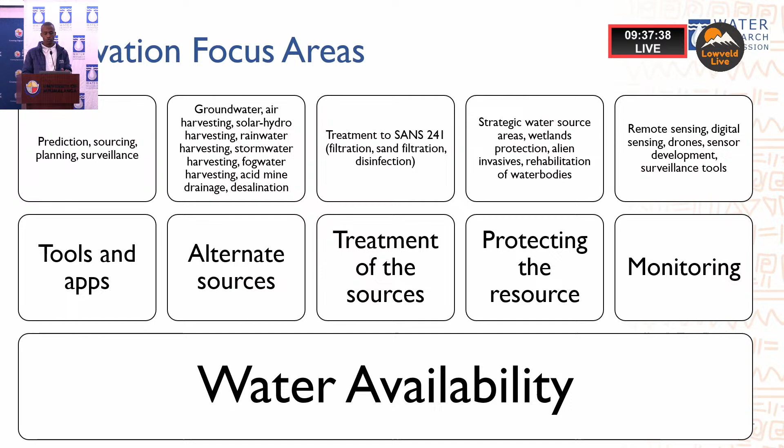And also, of course, protecting the resources, as well as a whole lot of background given yesterday in terms of our status of water resources in our country. And also monitoring, which Wandile also yesterday alluded to.

In terms of water use, we also look at water conservation and demand management, water losses, remote sensing, robotics, and some form of AI and use of technological innovations in that area to try to improve water conservation and demand management. We have some of the innovations that will be showcased later on in terms of this focus area. And water efficiency is quite important.

Actually, I'm on a WhatsApp group where yesterday an alert came in to say water alert - that Gauteng, all the councillors in Gauteng are required to attend a meeting with Rand Water, because a few days back Professor Turton from University of Free State indicated that if Gauteng does not conserve water by 10%, or reduce the use by at least 10%, we will face Day Zero soon.

So water efficiency is quite key, not only for there, but also for here as well. And as you have heard yesterday from agriculture and even the mining and the industries, in terms of water use, we need to be efficient. So there's a focus also on that area. And we have some of our innovations later on today in terms of planting a bag that uses less water, also in terms of water efficiency.

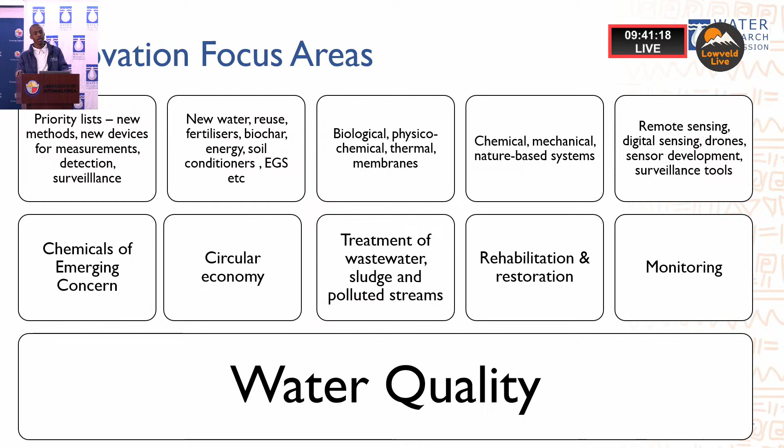And we are looking also in terms of wastewater treatment or sanitation, treatment systems that are biological, physical, chemical, and thermal processes as well, that try to not further pollute the polluted resources or increase the state further of our resources. As well as rehabilitation and restoration of some of the ecosystems through nature-based systems, mechanical systems, and also chemical systems. And also, of course, monitoring goes also with that.

So the WRC, through its RDI leg, noticed that actually some of the innovations don't get to the market, and they fail due to incomplete development. They are not ready for the market, or sometimes they are ready but the market is not ready, it has not been developed. And also sometimes innovators have not developed a value proposition, so that they present their innovations to address a particular problem, and also business viability, and also attracting investment so that someone can invest into some of those innovations as well, and also partnerships and brokering partnerships.

So hence, the Water Research Commission, through 2 key technology accelerator programs, intends to try to bridge the gap between RD and aid it to RDI, so that then the research can now start impacting people on the ground, the communities on the ground, and reach them and address some of those challenges that I just mentioned now.

So the WADER program at the Water Research Commission deals with more of water technologies, and the SASTEP deals with the sanitation technologies as well. So these are the 2 accelerator programs that basically try to be a conduit of some of the innovations and getting them ready onto the market.

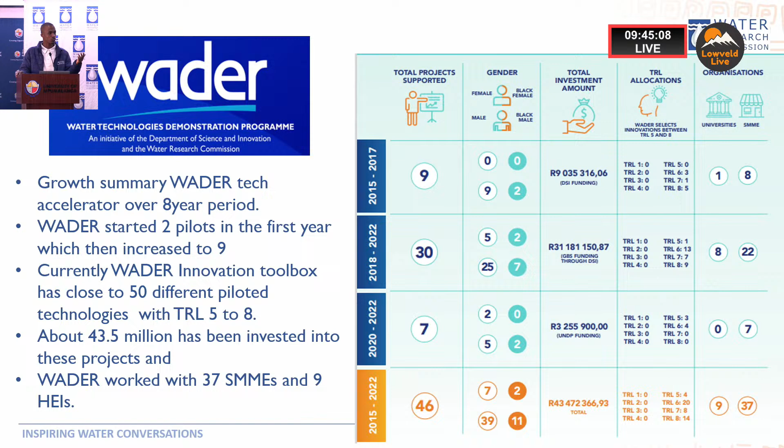So some of the technologies within WADER include alternative water sources. Groundwater is one of the sources due to limited surface water resources, so it's one of the options. We looked at things like sand water extraction, which we'll hear more of a presentation on later. And there's an innovation called Hydroblu, which helps in terms of accuracy of drilling boreholes for alternative water sources.

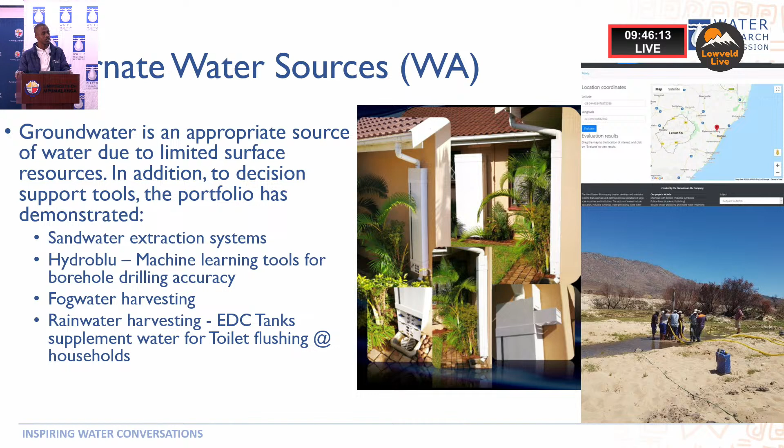Fog water harvesting as well, and there's this innovative EDC tanks - we'll play a video of that later on, which shows how you can harvest rainwater to supplement water for other non-potable uses in the house. The 3 pictures show you some of the innovation in the EDC tanks, as well as the sand water extraction pilot that we have had. The last picture is showing the Hydroblu.

So in terms of water quality and water use at the household level for communities, in terms of rainwater harvesting, we have this innovation called Villemans, which is a form of filter, so that the water you would have harvested from rainwater, which still contains some solids, you can filter using that, so that then you can use it for other fit-for-purpose uses like flushing, gardening, irrigation.

And also the slide-on gutter technology, where now for every form of roofing that you have, you can just harvest rainwater, especially if you have big coverage in terms of your house and roofing, so you can use some of these technologies to harvest rainwater. And also this grey water system that can be used for multiple use and a hands-free system, which you can use for encouraging hygiene and reusing grey water.

And in terms of non-revenue water, we try also to employ technology to do that. So there is this technology called AquaTrip - basically it's a valve that stops if it notices an unusual change in pressure, so automatically it shuts off because it will suspect that there's a leak somewhere. It has been piloted, and it's one of those innovations that can help in terms of water losses.

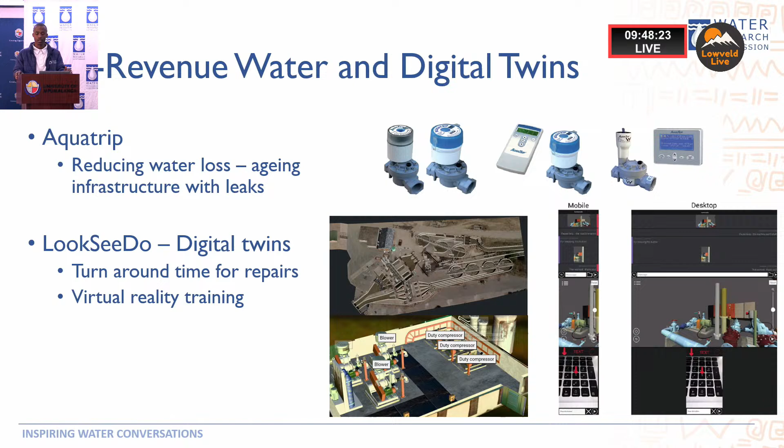And then digital twin - it's basically a look-see-do, remote assistant system, which means you may not always need an engineer on site. You can just have the system with a technician on site, and they are guided in terms of how they should fix or address some of the challenges on site, so that you are able to address a problem even quicker, because sometimes engineers may not have time to come to all the sites at the same time.

Coming to sanitation now - SASTEP stands for South African Sanitation Technology Enterprise Program, so that is for more of the sanitation technologies. You notice that the WADER portfolio covers more of the water themes and SASTEP covers more of the sanitation portfolio. Like I said yesterday, South Africa was not going to be able to achieve and provide full flush network-based systems for all communities due to the terrain, settlement types, water scarcity, and even issues of economics and challenges with regards to density.

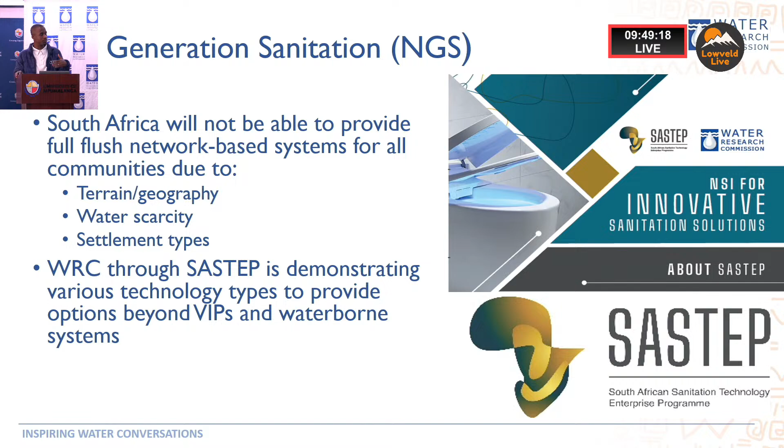So through the SASTEP program, WRC is demonstrating various innovative sanitation technologies beyond the two-binary approach, which was a VIP or waterborne system in the past, so that there's a pool of technologies that could be considered for different appropriateness under different circumstances or settlement types.

So the portfolio has 16 innovations, which include 3 non-sewer sanitation systems, 1 nature-based system, 4 water resource efficient pedestals, and sludge beneficiation and management technologies, 2 grey water systems, as well as one menstrual pad incineration system called the SHE, as well as a liquid gold diamond reactor which converts urine to struvite, and also technologies to address smell in existing pit latrines, including chemicals that we have worked with.

So just a bit of a snapshot of the program. 16 technologies are on the program, and through it, 6 technologies have been locally manufactured, some licensed internationally and some local. We've gotten 6 technologies locally manufactured, about 200 toilet seats installed in schools as demonstrations, affecting about 5,000 learners across various provinces, and about 30 million has been spent encouraging local manufacture of these innovations.

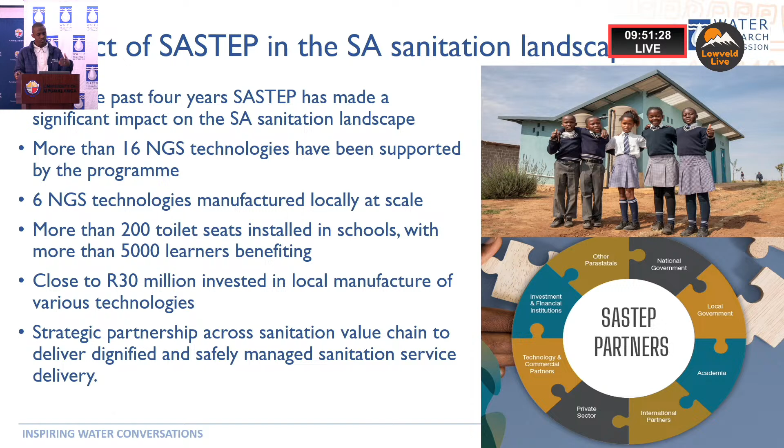We have struck partnerships with various key partners along the sanitation value chain, including national government, other parastatals, local government, academia, international partners, as well as the private sector and the community.

Some of the success stories include the demonstrations on the ground, which you can always visit at any time. Fortunately, we have one system here in Mpumalanga which you can go and visit. We've also seen uptake of some systems through CSI, and the CEO gave a good form of something that can be considered to aggregate CSI initiatives for such systems. We also have informal and rural setting demonstrations at those municipalities.

And recently, the WRC SASTEP program has been recognized at the World Water Congress in Toronto for its work advancing sanitation.

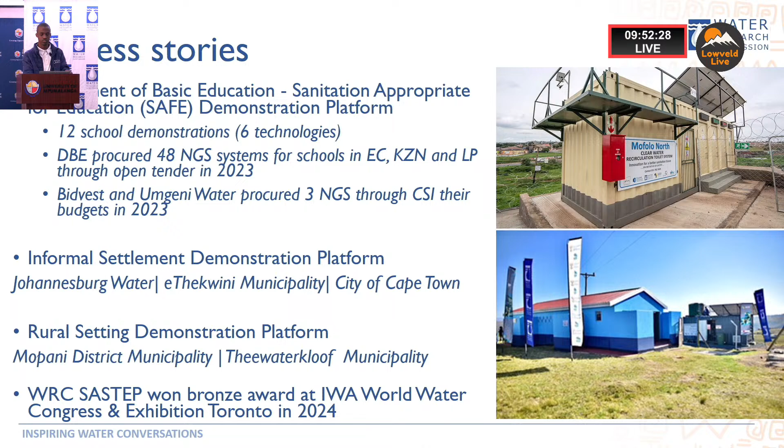Coming back to WADER a bit, some of the success stories: AB Farms has now become a fully developed business. Basically AB Farms does hydroponics, which uses less water, even recycles water, and uses less space to still achieve more with less. It's one of the technologies under agriculture addressing the challenge of doing more with less.

The look-see-do that I showed earlier has been adopted by Joburg Water in one of their wastewater treatment works. And the sand extraction has also been adopted by Amatola Water to assist with the water mix at one of their RO plants at Albany Coast.

We also do some form of skills development, because behind all these things, skill development is important. One of the key programs within the Water Research Commission is the Young Engineers Change Makers program, an annual program attracting young people from municipalities, who for a year get exposure to local demonstrations we are doing, but also international demonstrations, and boot camps to learn about some of the innovations. We also arrange international experts to come and engage with them, so that we can address and build capacity within them for the future.

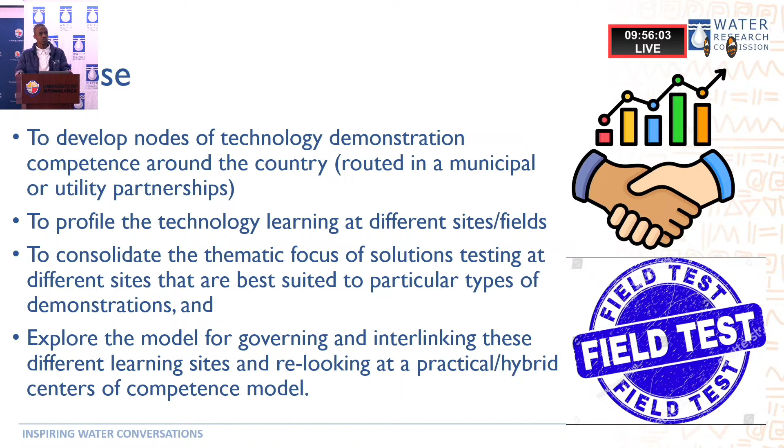So, like I said, each one of these testbed partners may be at one of those levels. Level 1 can be a university at bench scale. Level 2 can be a facility that is interested in innovation but does not have a dedicated facility for testing. Level 3 will be a water solutions testing facility or research lab with a dedicated space available for piloting as well.

Such as the UKZN, which has formed what you call the WASH Center, which is really doing well in terms of that. And also now the next level is where there is staff dedicated only for doing the R&D and the piloting of those new technologies as well.

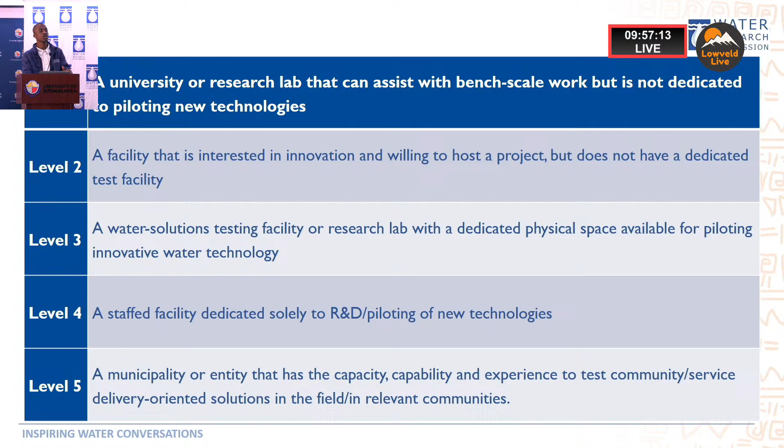And then level 5, where the municipality or the entity has the capacity and capability and experience to test community service delivery-oriented solutions in the field, such as what we call the engineering field testing that has been established by the University of UKZN, as well as eThekwini municipality and the private sector organizations involved.

So this is just a footprint in terms of where of some of the testbed partners in the country. We have 15 in Gauteng, 3 in Mpumalanga, 12 in KZN, as well as 4 in the Western Cape.

In terms of SASTEP, there's about 28 sites, with 5 in Gauteng, 2 in Limpopo, 1 in Northwest, 6 in KZN, 6 in Eastern Cape, and 8 in the Western Cape. Mpumalanga is not featuring, but we are featuring in terms of uptake. So you guys are already taking up, so you should feature in terms of uptake.

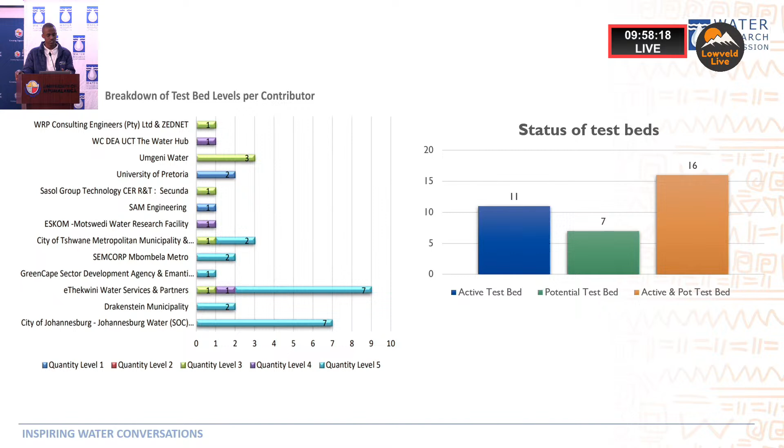All right, so this just shows the status of some of those testbed partners. We have 11 active ones, potential ones where we are engaging 7, and about 16 of them that are actively still running. And also this just shows you some of them, including the private sector partners: Sasol, Eskom, City of Tshwane, GreenCape, the list goes on.

All right, we do also do tech advisory, as I said earlier on, where various challenges that are facing these innovations, we try to address them, including technical, regulatory, market, business support, social development studies, and governance as well. So we have a panel of experts that are able to address or help us do a quick study to address some of the challenges or identify policy gaps that should be looked at.

And also independent technical assessment, where we don't just believe what the innovator is saying, but someone independent comes and evaluates and gives an independent opinion of that particular technology. And also there's an opportunity for engagement with some of the experts as well. And then we do provide a technical advisory note on some of the innovations and recommendations, if there are gaps in some of the innovations.

So today's speech, as I close, is just to show that as Water Research Commission, one of the outcomes is we want to be an innovation-driven sector. So based on some of the needs in the province, one alternative water supply innovation will be presented, one storage innovation or solution will be presented, 2 smart water apps, as well as 1 smart agriculture approach or innovation, and lastly 1 sanitation system for communal environments.

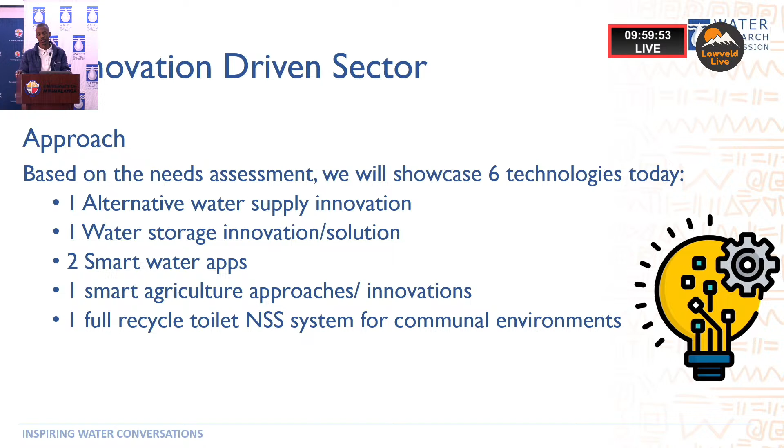All right, so you can engage with us. There are contacts in terms of adding to our testbed partnership if you are not already there, and see how we can work together to try to improve the sector. Thank you so much.

Thank you very much. I appreciate the presentation, and I think it's very important that I highlight that this shows that WRC is an innovation-driven sector. So one of the things that I just took from his presentation, which is very important, is that we are looking at water use efficient technologies, which we need to strengthen our capabilities in the province. And also wastewater technologies, treatment technologies, is something that we have got challenges with.

We're talking about, even yesterday, I think the municipality, even DWS, raised those. So these are the takeaways just for the WRC to make sure they look deep into these things that we really need support on in the province. The other one is around skills development. I think we talked about it. I saw that program. I wanted to say how many of the skills development programs did you also influence from Mpumalanga? So I think there's a gap. If you look at these key 3 things, we were just talking this morning with the provincial head to say, what are the takeaways?

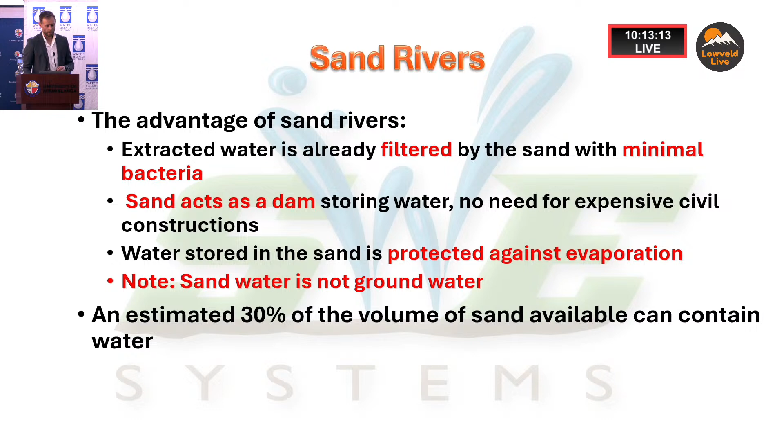It is not linked to your groundwater table directly. So your water is going to be around, let's say, starting at 30 centimeters depth, where your groundwater might be at 60 meters depth. So it's separate, it's not groundwater. You can work out the estimate of your sand volume, around 30% of your sand can store water. But the main challenge has always been to efficiently extract that water from the sand.

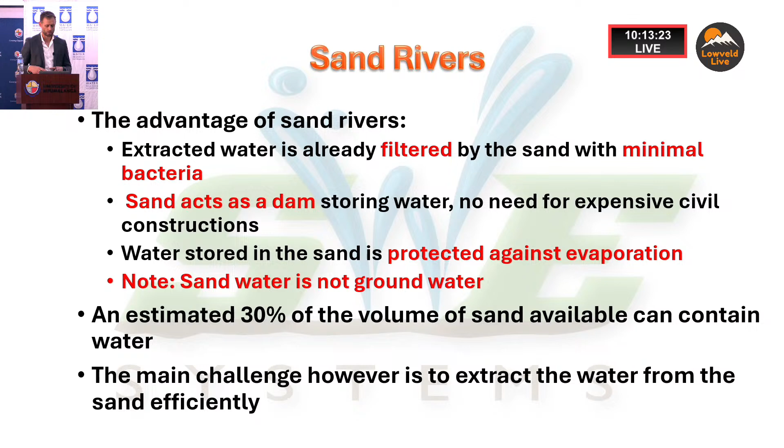So that's where the technology comes in. If you look at the design of the system, it creates a suction force within the sand, sucking the water from the sand up to 10 times faster than your natural infiltration rate. The system is fully concealed, so everything is under the sand, meaning even during floods it continues to supply water. It is quick and easy to install, and what's very important for us, it is automated and easy to use. The moment you make something too complicated, it becomes a white elephant.

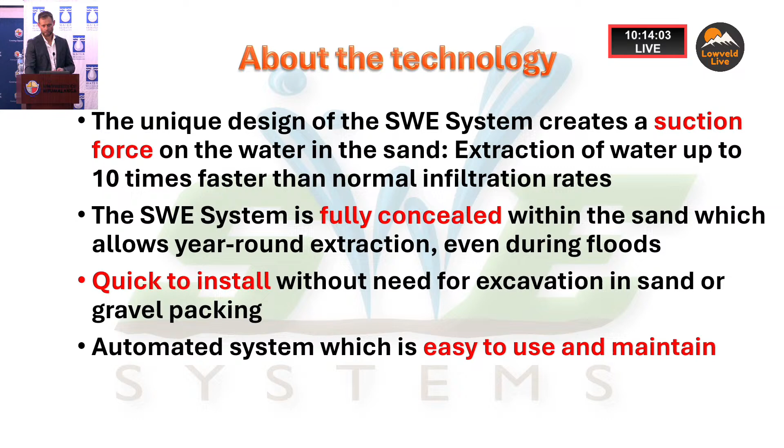So a basic diagram of the system: it is installed vertically. We only extract at the bottom section of the unit, because your cleanest water is also there, and you've got a longer water supply during that period. That water is sucked out and pumped to the surface.

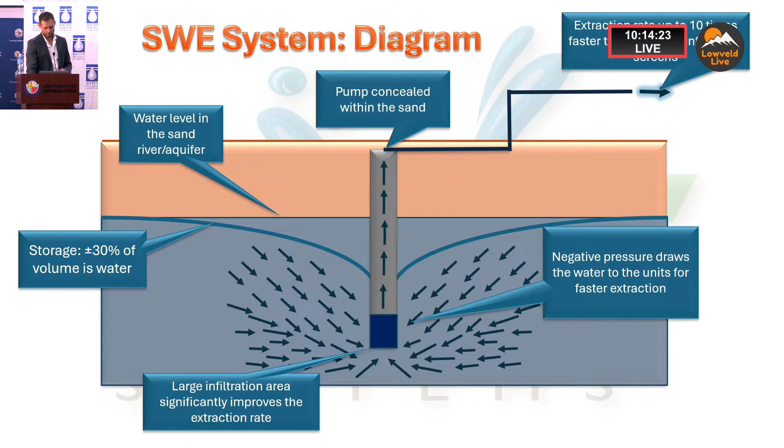Now, the needs that we address are firstly, a remote village without access to water supply, a water treatment plant overstressed by poor water quality, emerging farmers lacking access to water, or game reserves that need water for animals and accommodation areas. In this presentation, we're going to focus on the first two.

So firstly, looking at Mpumalanga and the sand rivers. In Mpumalanga, the sand rivers are mainly focused in the area to the east of Mbombela and up north past Bushbuckridge. This is not to say that's the only areas—those are the main areas. There are a lot of other sand river options, and each municipality will know better what is in their area. But the examples we're going to use mainly focus on this area.

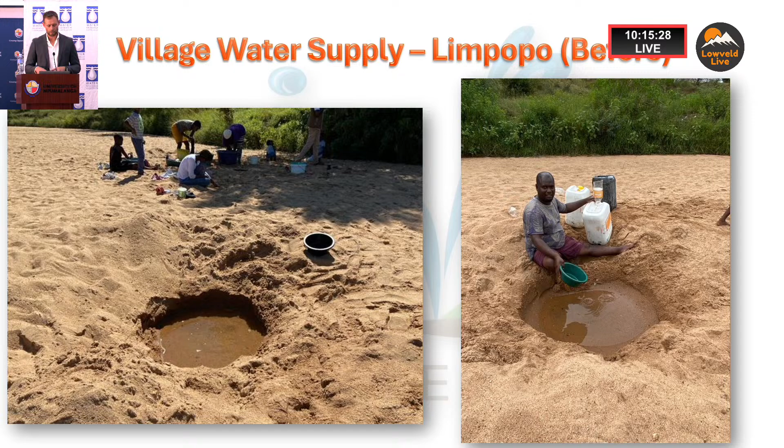So looking at village supply, I'm going to give examples of projects we did in Limpopo. This is the situation of the villages when we got there: they had to dig for water, and that was the only clean, drinkable water they had. The boreholes were struggling to supply water—they could get water once every four weeks, and that was very saline-based water.

When we started the installation of the technology, within the first week of getting to site, we started supplying water to the community, clean water coming from the sand. We pumped on average 60,000 liters a day for communities coming to fetch water. So it was an immediate effect on the community.

After completion, this is a good example of what a village system includes. You've got your sand river at the back, which only runs a few times in a 2-month period throughout the year. The rest of the time, there's no surface water there. On site, you've got your raw water storage, your extraction units in the sand, purification, then clean water storage. The large tank is a 350,000 liter storage tank, connected directly to the existing reticulation network of the village.

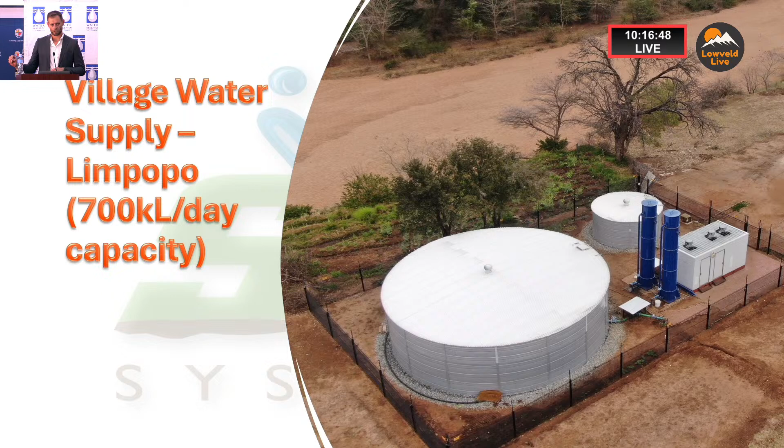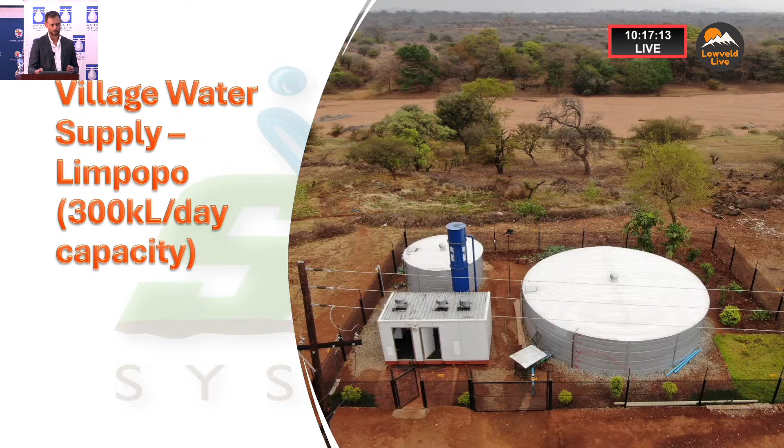Another example is a 300,000 liter a day capacity system. What's important about this image is that this site is 4 years old. If you look at the quality of the site, the community is looking after it themselves. They're planting trees, fruits, vegetables, and grass. They're really looking after it because they can see the value of their system.

To date, those systems have supplied over 200 million liters of purified water to the communities. A system can be completed between 3 and 4 months, and it can be managed, if required, by the community members themselves. Now, examples of Mpumalanga village supply.

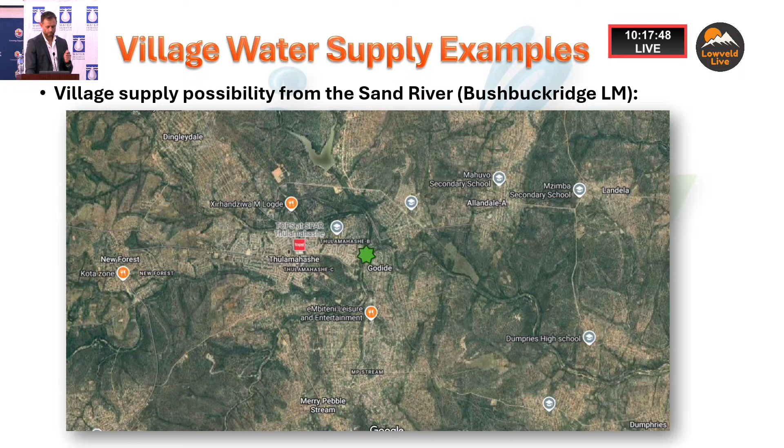If you look at Bushbuckridge, there's an aptly named sand river running through the villages in that area. If you go and look at the sand river itself, what we see there is a massive water source that can supply a lot of these villages with their own water supply. Anytime we see an image like that, we see good quality drinking water.

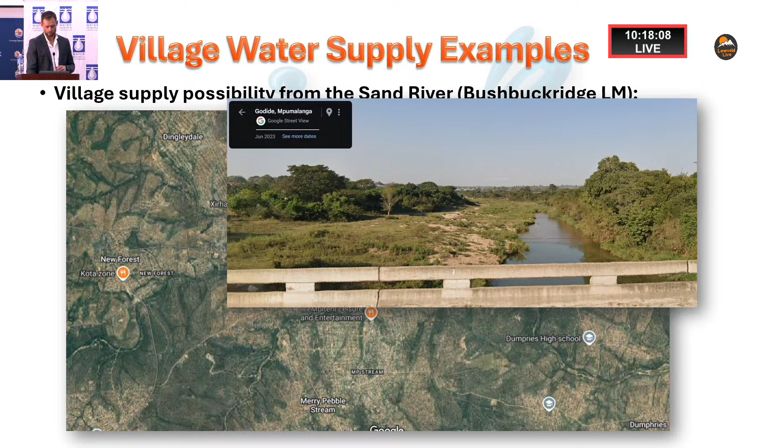I just want to use this as an example. No history about the project, it's just a project that I saw, but I think it's a good example of possibilities - the Dumphries B development. If any such development wants to be done and there's a water shortage, instead of putting additional stress on your existing treatment plants, this one requires around 600,000 to 800,000 liters a day.

The Sand River next to Dumphries is excellent for water supply. If you look at that water level, it's very difficult to abstract, but the water is in the sand. So it's available for a development like that.

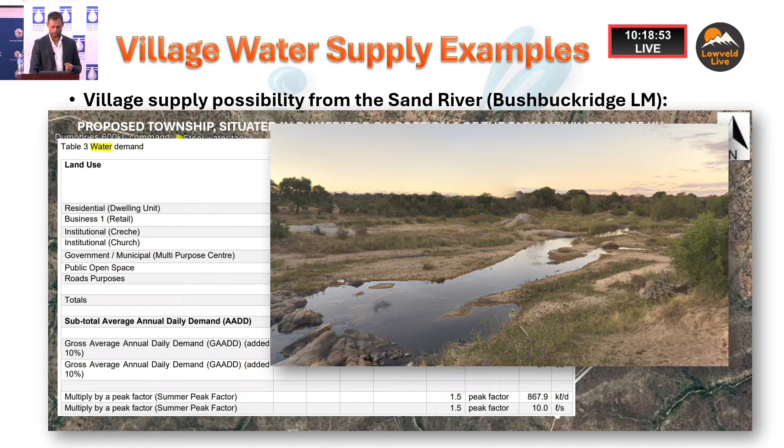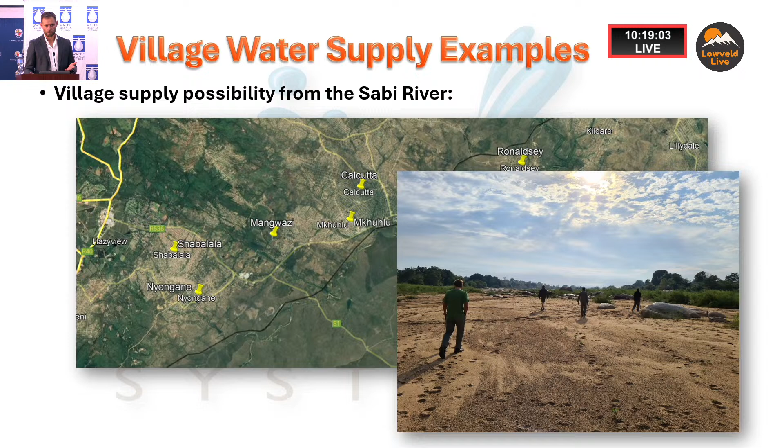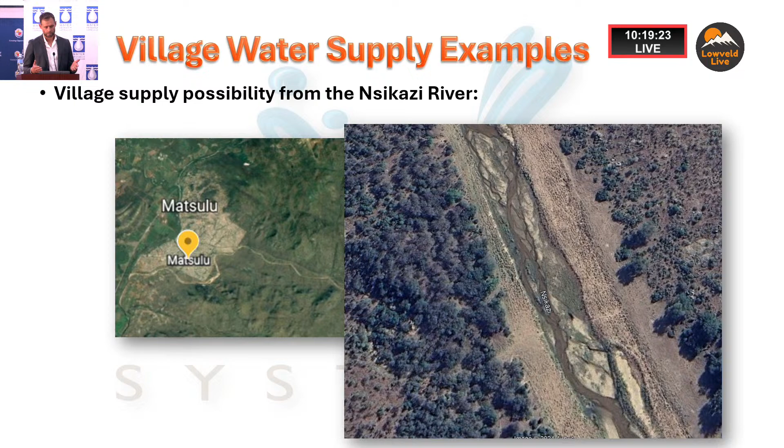Examples of villages next to the Sabi River, to the east of Hazyview - that's the Sabi River, for us a massive water source. The Nsikazi River, if you look at Lupisi, Matsulu, the villages running next to the Nsikazi, again a very good water source. We are talking to guys looking at developing in Nkosi City, and this river is an excellent water source for Nkosi City.

Now, touching on the second point, municipal water supply. This is mainly raw water supply, because what we do is supply to existing water treatment plants, and from there it's treated by the municipality itself.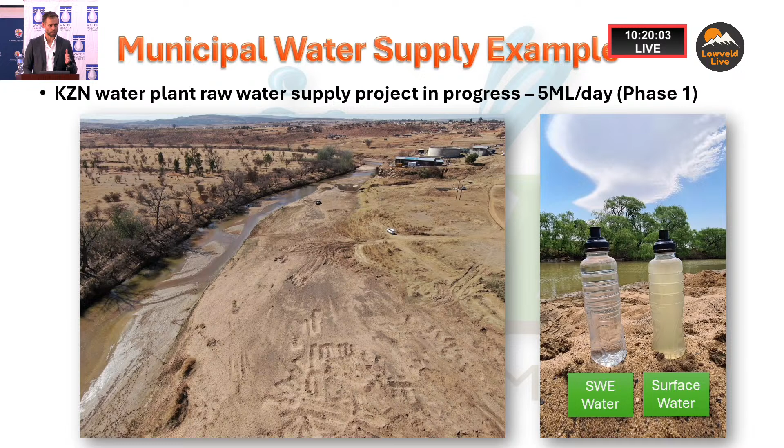An example is a project we're doing in KZN. The first phase is a 5 megaliter per day abstraction. They're looking at a 3-phase approach, up to a total of 15 megaliters a day. If you look at the river, they are struggling to abstract that water because it's very shallow, so they can't supply sufficient water to the communities.

Looking at the two bottles, the water on the left is from the sand, the water on the right is from the surface. The turbidity of the sand water is less than 1 NTU - we were running below 0.6 NTU of water supplied to the plant, where your surface water is over 25 NTU. Now, the impact of that - if you look at the plant, we do not use the clarifiers or the filters.

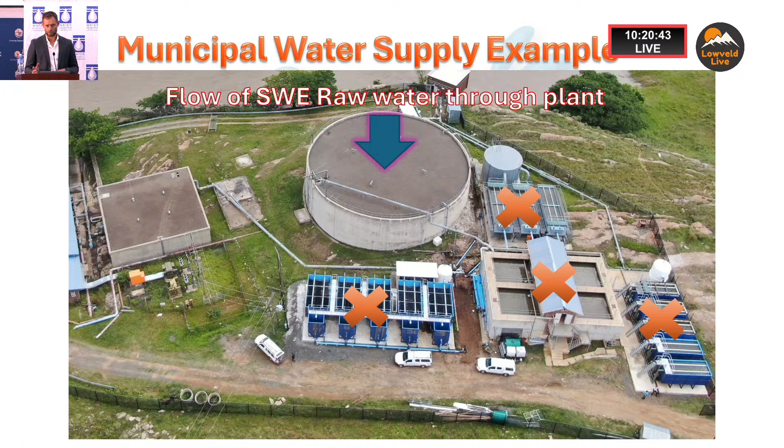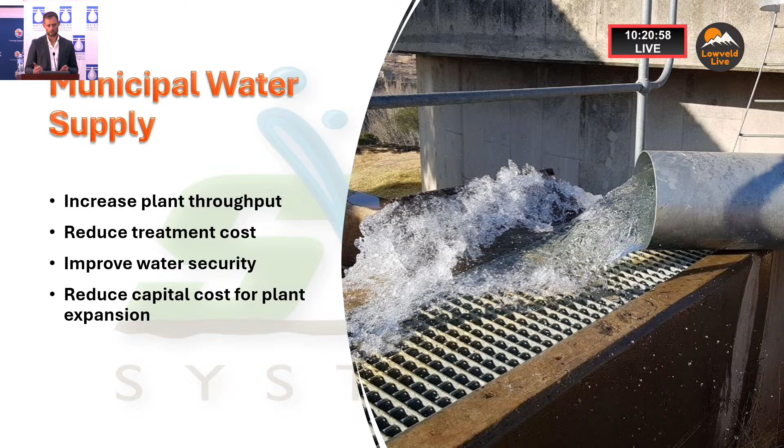We go straight into the clear water tank. From there, chemicals are added and it is supplied directly to the communities. The impact of this is increased plant throughput, reduced treatment cost, improved water security, and if you need to do expansions, you can reduce the cost because your incoming water is significantly cleaner.

Municipal supply potential - two examples are next to the Crocodile River: Malelane, Hectorspruit, Komatipoort. We've done extraction tests at Malelane to see the water delivery potential, which we found was very good. And then also at the Sabie River, you've got Hazyview as an example.

And I made my 10 minutes, thank you. That is a summary of what the sand water system does.

Thank you, Stefan. As he was presenting, I felt like I have been also extracting sand because I'm one of those community members who once dug some of those things to get fresh water. So some of us have done it.

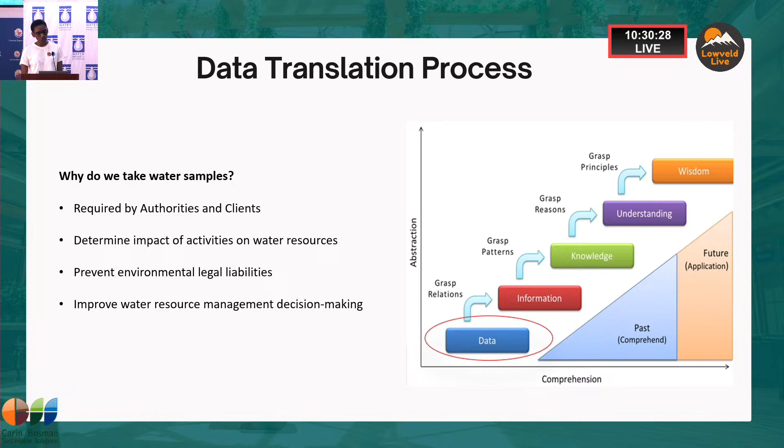So why do we actually take water samples? We do this because it's required by authorities and our clients, and also to determine impacts of activities on the water resource.

What is the problem we identify? We realize that we are very data rich, yet knowledge poor, because different organizations collect large amounts of water monitoring data, but they do not know how to utilize or interpret it properly.

Another issue is insufficient decision-making without proper analysis, and all of these lead to wasted time and money, legal liabilities, and loss of trust from authorities and stakeholders.

To introduce our solutions, we have Leguaan, software as a service, and our WaterMonster. Leguaan converts your water monitoring data into interactive graphs, available online in HTML format, very interactive, meaning your water monitoring data becomes a valuable business and water resource management tool.

Our WaterMonster app enables digital capturing of your data, including electrical conductivity and water conditions, and it actually captures the location of where you did those samples.

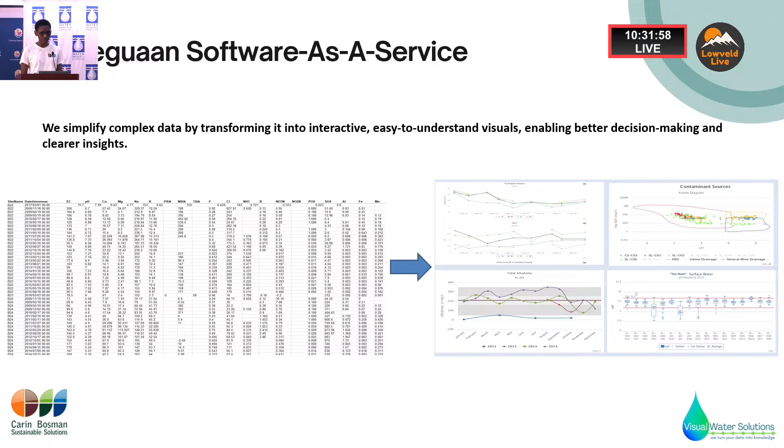So we help you convert your Excel data into more interactive graphs and reports. This is an example of our graphs that we do with Leguaan, and please do come to our store so I can show you how interactive they are.

The benefits of Leguaan are simplified data interpretation, real-time data accessibility, cost and time efficiency, and improved compliance and governance.

These are our packages, also available on our website, and I can show you when you come to our store. They range from the basic plan to a water guide plan, from 50 Rand to 200 Rand.

This is just a tour of our WaterMonster app. It's basically a digitized field data collection form that gives you your results immediately when you get to the office.

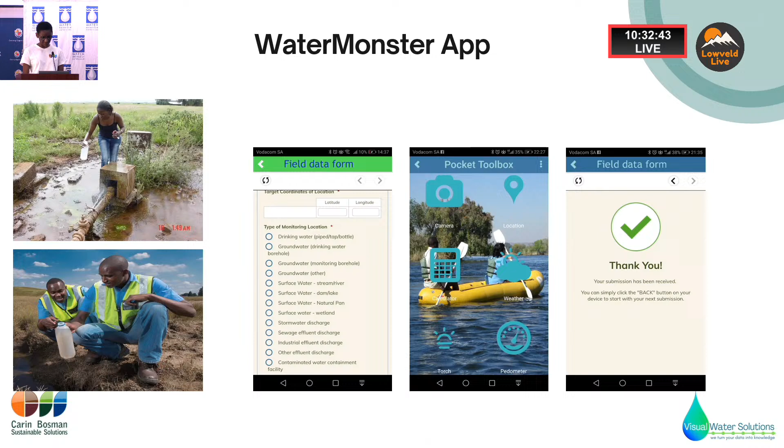The benefits of the WaterMonster are digital field data capture, geological and photographic records, instant data availability, and a user-friendly interface. These are also the prices of the packages we have, and we also tailor them according to your needs.

With the support we got from WADER and the WRC, we were able to conduct a comprehensive business model analysis and develop a strategic plan that revealed significant growth potential. This was conducted by Bosch Capital.

Our goals are to increase clients' adoption, to get about 10 clients for both Leguaan and WaterMonster, to expand app availability to have it on iPhone, user engagement and training, and also to create employment opportunities.

Our plans moving forward: we want to refine our WaterMonster app, focus on marketing and sales, legal compliance, and intellectual property to make sure our innovation gets patented, and lastly technical team and operation support.

The assistance we need is partnership with local municipalities, access to network and market connections, technical and product development support, and marketing and PR support.

In terms of our competitors, we have identified three: AquAffirm, Aquatic Informatics, and Xylem. Our value proposition or competitive edge is that our products are custom built for local conditions, user-friendly with no need for expertise, and cost-efficient.

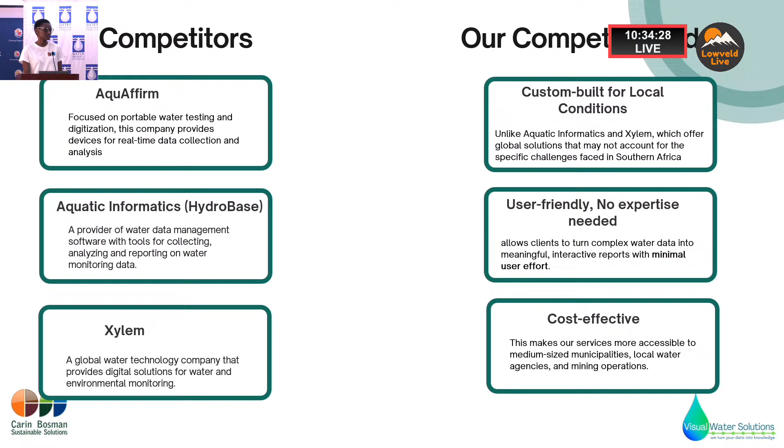So our call for action is if you want to collaborate into making, turn water monitoring data into accessible visual knowledge and wisdom using tools of the 4th Industrial Revolution. Thank you.

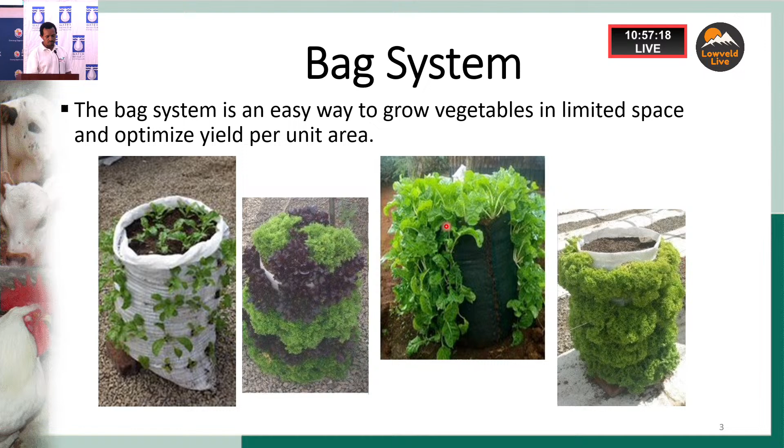This beautiful bag system is also presented at our ARC stall today - please visit and interact with the team actively involved in this project. As mentioned earlier, this simple technology means the bags can be placed anywhere, whether on a concrete slab or any open space.

Now, as researchers, you know how much we love our data to test that. What if what we're saying, rolling out to the community, doesn't make sense? We need to check that first before we roll it out.

So we conducted a simple research study to compare the production of the bag system and an open field, to see that using the same unit area, how many bags one can produce and place, how much production one can get, and what resources one uses - the amount of water utilized, and whether it is really efficient.

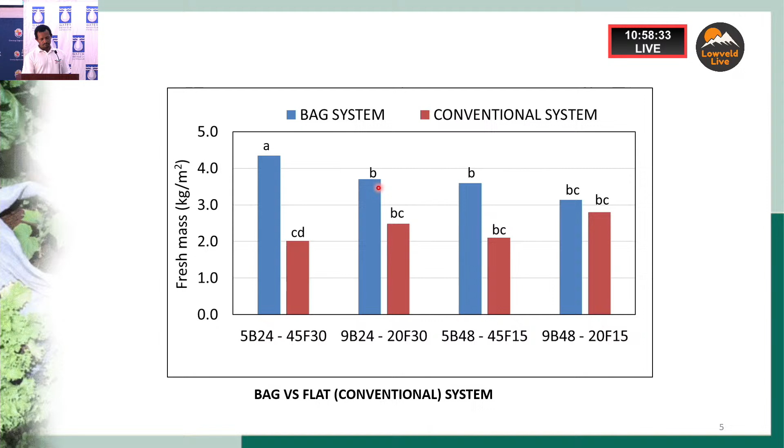These are the few results which we found. As you can see, the bag system produces more biomass per unit area compared to the conventional or open field. When it comes to water use, also the same pattern.

You save more water with the bag system than with the open field, because we have less loss of water through runoff, percolation, drainage and so on, which also minimizes the environmental impact of conventional agricultural production. Water use efficiency was also much higher with the bag system compared to the conventional vegetable production system.

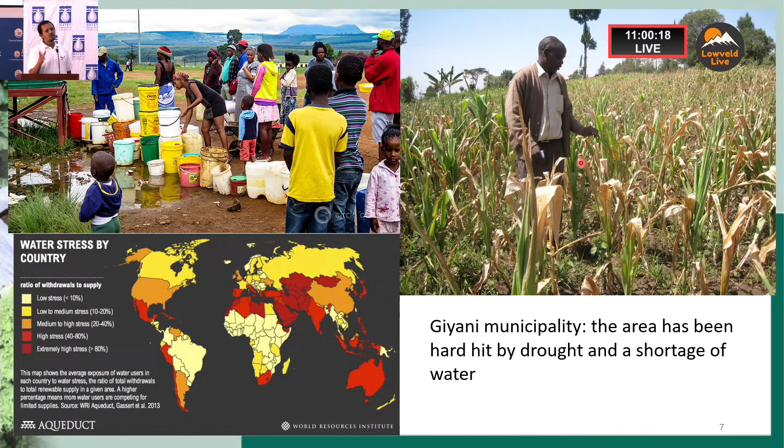Another interesting part of this project is that it involves the community. It's a very participatory project, where the community fills up the bags, participates in planting, maintaining the vegetables, and of course irrigating them every day, putting in fertilizer, and so on.

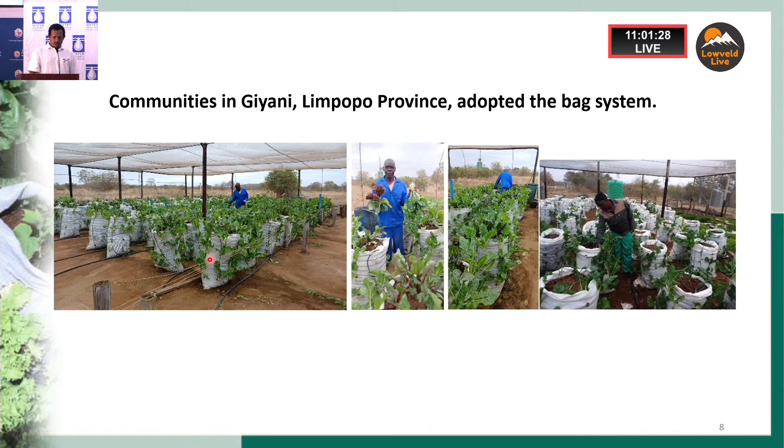So far, the project has been implemented successfully. There are minor challenges we face, like any other innovation, but not to a large extent. For instance, if one uses the wrong grow medium, that might create root bounding and affect production. Also, the bags we use, the polypropylene bags, disintegrate with time. If one uses it for crop production for one cycle, using Swiss chard for example, I can get about 4 harvests, but after the 4 harvests, the bags start disintegrating.

Which is good in a way, because before using the grow media for another cycle, it has to be disinfected, as there might be unfriendly pathogens there. What the farmers do is spread the grow media on the open field and allow it to solarize, using the sun's radiation to kill the unfriendly pathogens, which so far has not created much of a challenge.

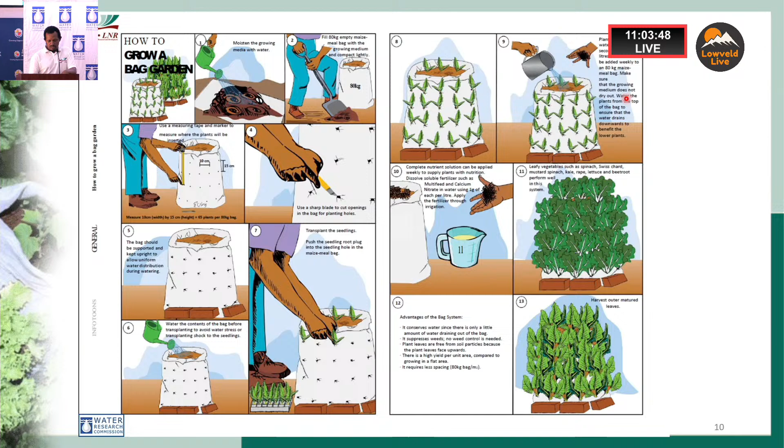With that, I would like to acknowledge the teams involved in this project, the WRC led by my colleague Dr. Sam and Zanele, and the whole WRC team for allowing us to be innovative and funding our innovation. And of course also the ARC team for working hard, traveling from Pretoria to Giyani every day, which is not easy. So I would like to also acknowledge the ARC team and the department. Thank you very much.

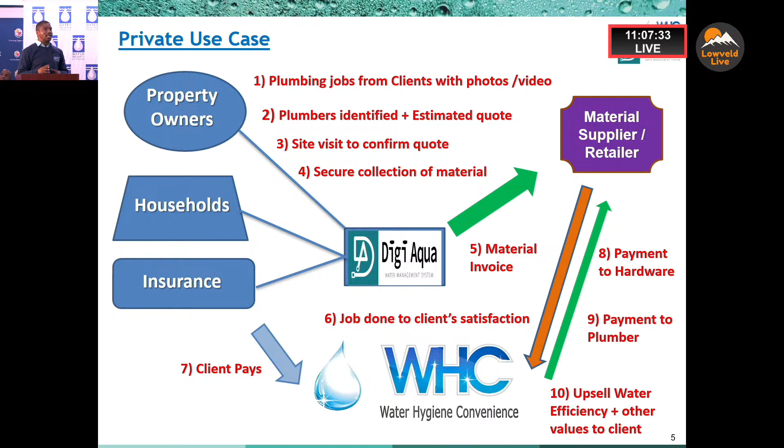This is a viable solution we've managed to pilot over the past 6 months, thanks to WRC. We have a private use case and a public use case. A public user case is when we involve the municipality, where citizens report related public infrastructure that is damaged or has a leak with the meters and so forth, and that too would be uploaded onto the system.

It would have a GPS coordinate, so we'd be able to identify where this problem is. Another issue within municipalities is that whenever resources are deployed to fix these challenges, at times insufficient material is procured, or the team is missing a more relevant member to engage with a particular problem.

So in this instance we would send out a drone that would analyze the situation prior to resources being deployed, and based on that footage we'd be able to assess, and the municipality can make a more credible decision on who to send and which materials would be required.

From a homeowner perspective, we would install IoT devices, smart water meters, which would speak to this application and identify leaks, especially overnight, because most leaks are only identified when the problem has escalated. With this identification, both the municipality and the homeowner will be informed, and the homeowner will be encouraged to take action immediately by deploying a vetted certified plumber closest to them.

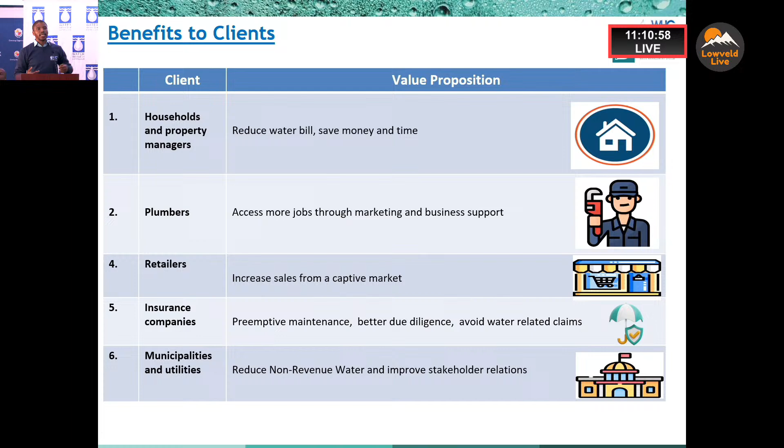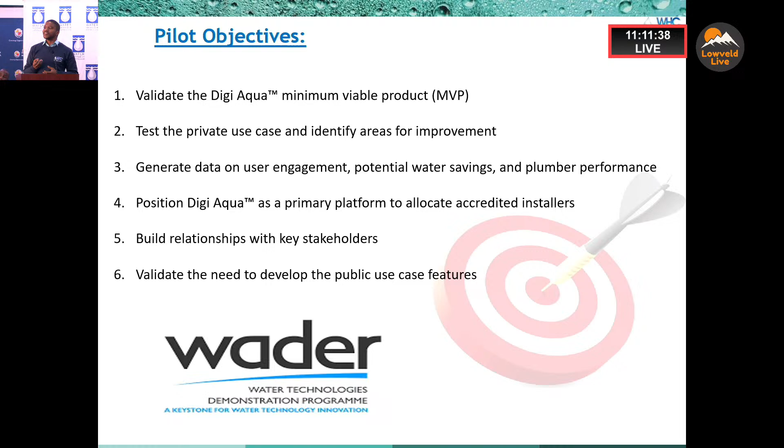Thanks to WRC and the WADER program, we've been able to validate our assumptions. We created an MVP, a minimum viable product, just to connect plumbers to homeowners to make sure what we're servicing is worthwhile. Our objectives were to test the assumptions, generate sufficient data, and see how we can improve water efficiency through turnaround time and plumber performance. Most importantly, we wanted to validate if there's a need to develop the public use case. Needless to say, this was a success — we made over 400 interactions with plumbers and homeowners before, during, and after the pilot.

We have also managed to get a lot of interaction on how best to improve the solution to make it more relevant. In one of our best case scenarios, we've managed to save just over 80% of the water that was lost due to our intervention.

Through this initiative, we also got homeowners explaining that had they been able to report their leaking meter, it would have been resolved by now. You can imagine some of the times whenever a municipality gets a report of a leaking meter, it takes time.

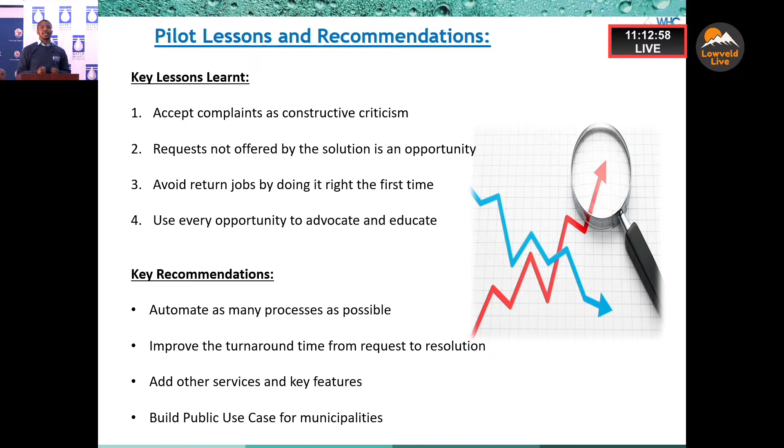Needless to say, we have a lot of lessons learned and recommendations to that extent. So we are currently working on these lessons and recommendations to improve our technology. Moving forward, we are looking forward to a more robust solution that will cater for both the private and the public sector.

This initiative would not have been possible had it not been for our key strategic stakeholders. Gratitude to WRC for making it happen. Everything was an assumption until WRC came to the party with financial support that helped us to get on the ground and perform this particular pilot. I can obviously double click on each and every stakeholder we are working with and how they are contributing towards our solution.

As I mentioned, yesterday while being part of the crowd, I heard a lot about other problems being faced. So I thought I should bring to your attention two of the other solutions we are offering. For those who are not aware, toilets are the single largest water consumer in the house, and according to Rand Water, toilets inevitably leak. It's not a matter of if, it's a matter of when.

And when they leak, they waste over 250,000 liters of water per year. That is like 2,500 bathtubs. So we have a solution which we call the leakless valve. If you take the opportunity to come to our stand, I will demonstrate it. It is basically a retrofittable device that controls the water flow, identifies leaks, and stops the water from flowing in the instance of a leak.

It can save over 80% of the water that is currently being lost. Massmart was so impressed with our technology that they decided to pilot it before offering it to the various clients in the Massmart group. So we conducted a pilot for them at the Jumbo store in Polokwane. We installed 21 units, and from those units, we managed to save them over 84% of the water they were losing. In monetary terms, that is like 3,000 rand per toilet per year.

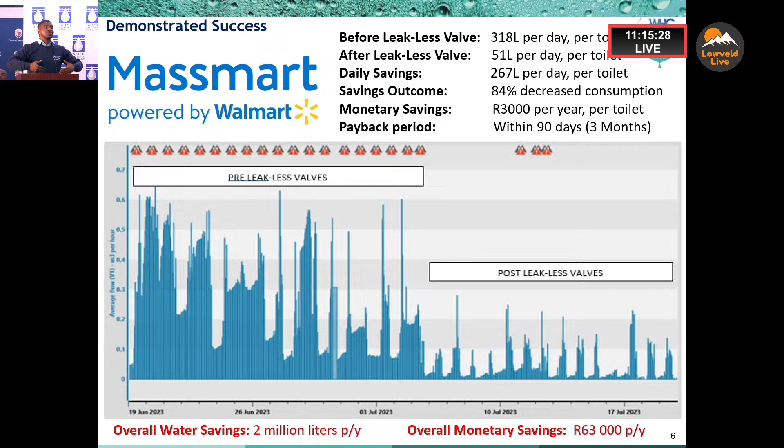The payback period was within 3 months. Mind you, those 21 toilets per year can save over 2 million liters of water and 63,000 rand. You can imagine, Massmart has over 400 stores nationwide, so the impact that can be created through this is massive. To this extent, we already have an SLA with Massmart to install accordingly prior to them offering it to the public through one of their outlets.

We were also requested by City of Tshwane to conduct a pilot. With this pilot, we managed to train 20 youth, women and men, to be certified plumbers. We also created jobs for them by teaching them how to assemble the leakless valve and install it throughout the community. We installed 865 units, and to date we've managed to save over 90 million liters of water.

I kid you not, we then got a project awarded by Nkangala District Municipality, bringing it closer to home here in Mpumalanga. The objective of the project was to train over 200 youth, women, men and the disabled to be certified plumbers and also how to assemble our technology. We are the exclusive manufacturer. We are the patent holders in 40 countries of this technology.

So we would manufacture the components and set up an assembly plant here in Mpumalanga, and then 100,000 units would be installed in the local communities or local municipalities. The objective was to save over 3,000 megaliters of water and approximately 20 million rand per year through this intervention. This project would have paid for itself.

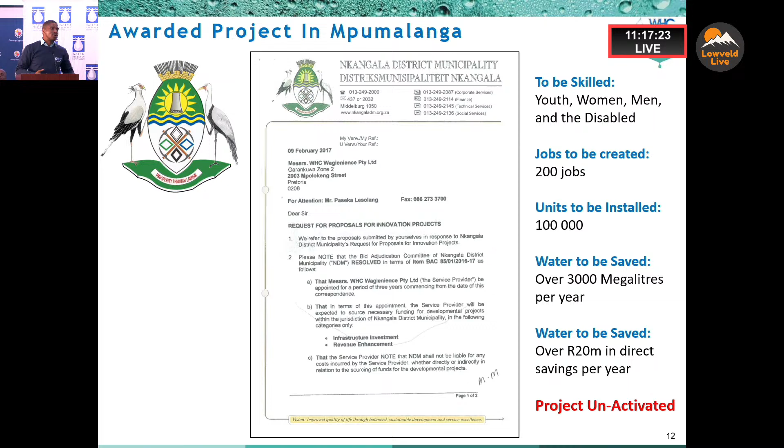This being said, ladies and gentlemen, I'd like to tell you about the last but not least. There was a lot of talk about vandalism of water infrastructure. Now, I'd like to tell you we have a vandal-proof technology.

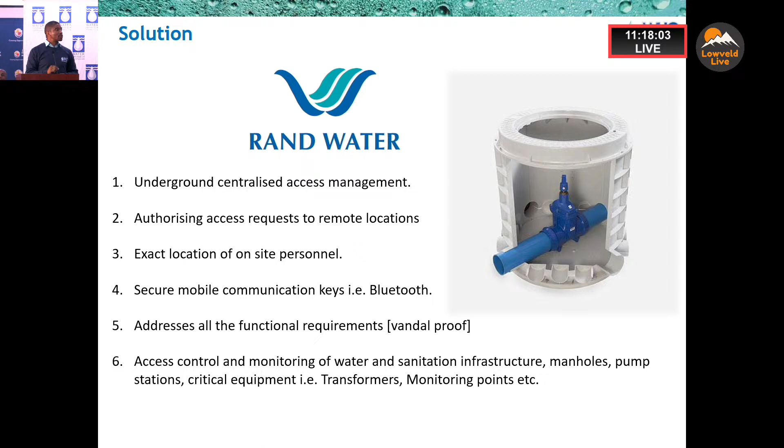This technology is an underground chamber designed to protect all water-related infrastructure and critical infrastructure, things like your TRUs, valves, monitoring points, and transformers. We are currently piloting this technology with Rand Water in Gauteng.

This technology is made out of a reflexive material, which means any impact made, say a hammer thrown onto this product, bounces back. It has a variety of sensors: heat sensors, pressure sensors, humidity sensors, and vibration sensors.

So whichever interaction is made from a vandalism attempt, it triggers an armed response, and the culprits can be dealt with. This particular technology has a lifespan of 40 years, and it also has controlled accessibility.

We are using a Bluetooth key, which means only technical people authorized to access these chambers will be able to access them as and when the schedule pertains. Should they try any other time frame, the key will not work.

This same technology allows the critical infrastructure to come above the surface, and they operate from eye level. Once they're done, it goes beneath the surface and is protected wholeheartedly.

So at Enviro Options, we also know that water is a very scarce resource, and therefore we need to take care of this resource. In our case, we make use of water efficient solutions, sanitation solutions, or non-sewer sanitation solutions to save this precious water resource. We are a company with 30 years of experience, so I'm confident that we have paid our school fees in basically what we are doing.

Just to give you a little background with regards to the Enviro Loo Clear non-sewered sanitation solution, which is the product I'll be presenting on, the Enviro Loo Clear non-sewered sanitation solution is an outcome of the Bill and Melinda Gates Foundation Reinvent the Toilet Challenge. So through WRC as well as SASTEP, we were requested to evaluate this sanitation solution to see if it's best suited to be implemented in African conditions or African countries.

We have implemented a couple of pilot projects in different provinces through WRC and SASTEP, and those projects were well accepted by South Africans in different provinces, in different communities. Our value proposition does not only speak to addressing sanitation alone, but also to address the local economic element in the community we operate in, in that we create jobs as well as engage the community. The reason we engage the community is because we want to raise awareness of the services and products they're going to be getting, but also to ensure that they take part in the decision-making of the products and services they're going to receive.

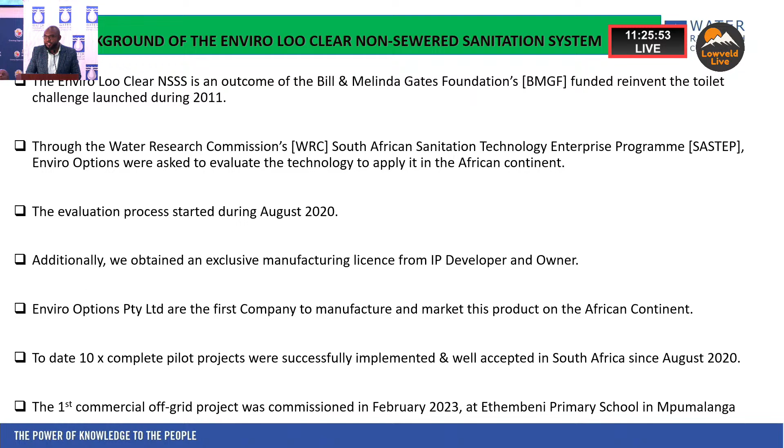So the market is looking good, and we've got good products and services that will address the sanitation issues that are on the ground. If I were to describe this product in 3 bullet points: it's an Enviro Loo Clear non-sewered sanitation solution, completely off-grid, which basically uses natural biological processes to treat wastewater on site.

Once we've treated that water, we then disinfect it by ozone, and instead of discharging it into the stream, we refeed it to the front-end ablutions for reflushing. So it's a matter of treating on site, and then reuse and recycle.

The system itself comes with a control room, fully automated with a PLC as well as an electrical distribution board, so we're able to monitor the system remotely through an off-site remote monitoring app. Also, when you install the system, we only load water once because it's a closed loop system.

So you load it with water once, and that water does not have to be clean, potable, consumable water. You can get it from the river, load it into the system, and the system will then treat it. The system uses a natural biological process to treat the wastewater on site, so you do not need any chemicals to treat that water.

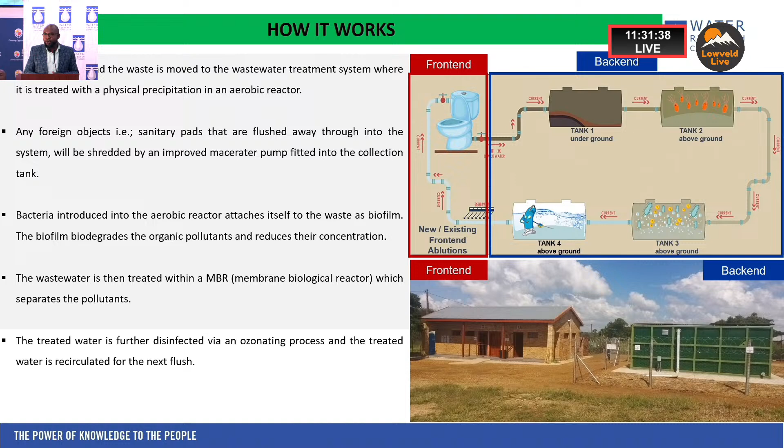In a normal wastewater treatment plant, this is the point where they would discharge this water into the river or into the stream. In our case, we feed it back to front-end ablutions for flushing. So, ladies and gentlemen, in our case, the point is just to move away from using clean, potable, consumable water to flush the poo, to using recycled water on site to do so.

Okay, as I continue, I see this, there we go. Okay, I'm just wrapping up. Okay, it's off. Yeah, looks so. Okay, the technology has just gone south. However, I was just wrapping up.

From EnviroLu's point of view, how we work, our model is that we keep 10% of the stock on site, because we're using what you call the small, medium, micro enterprise companies.

Those small micro enterprise companies are fully trained. In other words, we transfer the skills to them, and then they are the ones that will basically take care of the onward service maintenance as and when it's required. This is related to the mechanical.

However, in terms of the maintenance, what we do is our maintenance schedule and maintenance process is well planned and well scheduled, in that we do not have to tamper with or disturb the program either in the school or in the community where this project is installed.